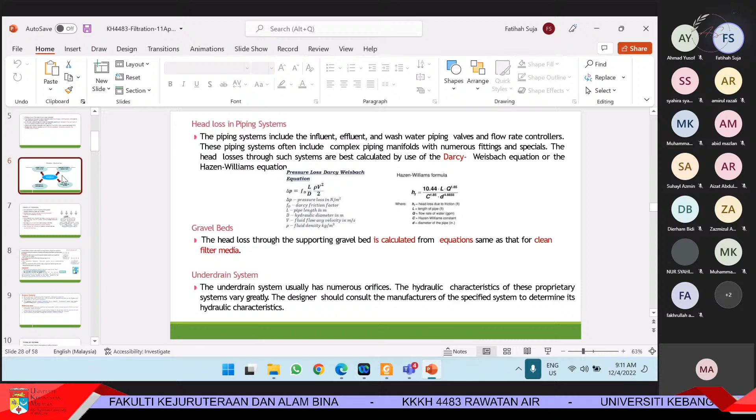Yesterday we were talking about 2 types of filter, sand filter, which is actually a physical process, but the mechanism on which the colloids or suspended solids are removed actually depends on a few mechanisms: adsorption, straining, biological also, because we have that slime layer of biofilm, and we also have what else? These 4 methods: adsorption, straining, biological, sedimentation, and also electrolytic action.

So of course the decision on whether to use slow sand filter or rapid sand filter generally depends on the amount of flow that you want to treat, because usually after sedimentation, the quality, the suspended solids, the turbidity, they still have 1 to 10 NTU, or 5 NTU. So that's why we need this filtration before the water is treated for disinfection.

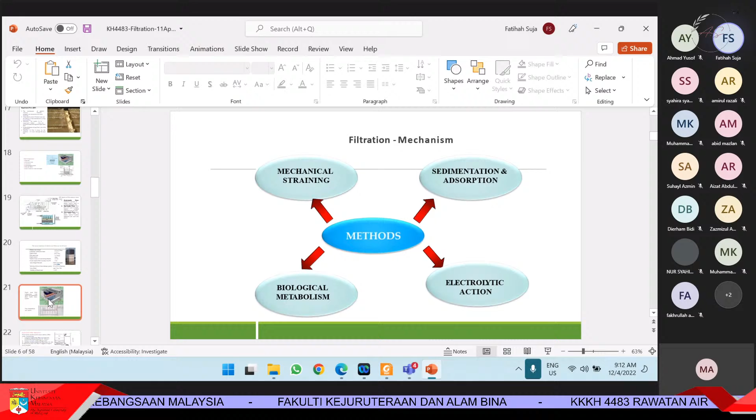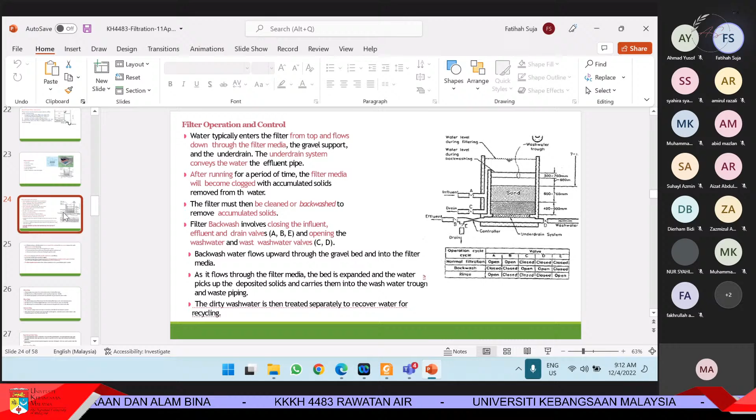Okay, so we continue on from yesterday. The rapid sand filter, because this is something that you can filter at very high loading. So you need to backwash the system, meaning that why you need to backwash the system, because once you arrive at the head loss, head loss meaning that the effluent turbidity will increase. So that's why you need to backwash the system, meaning that you have accumulated all the solids in the pores of the grain or media that you use for your filtration.

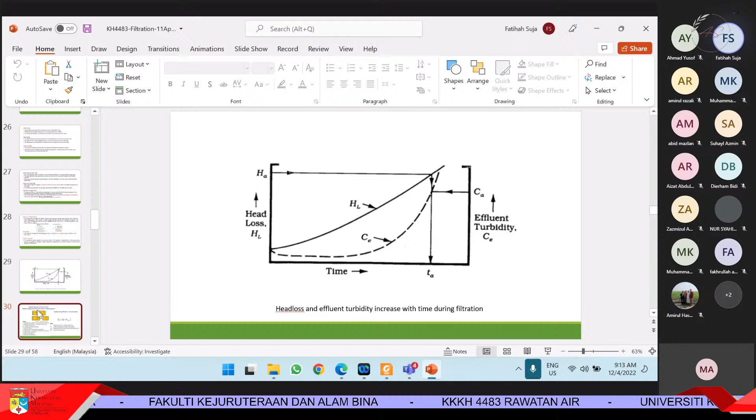That's why you have to backwash the system to dislodge or to make sure that you wash out all the accumulated solids in the pores of the media. Okay, so this is the equation, because even though it's due to the suspended solids, at the clean filter bed, meaning that at the beginning, before you input any influent to your filtration unit, you have already experienced a head loss.

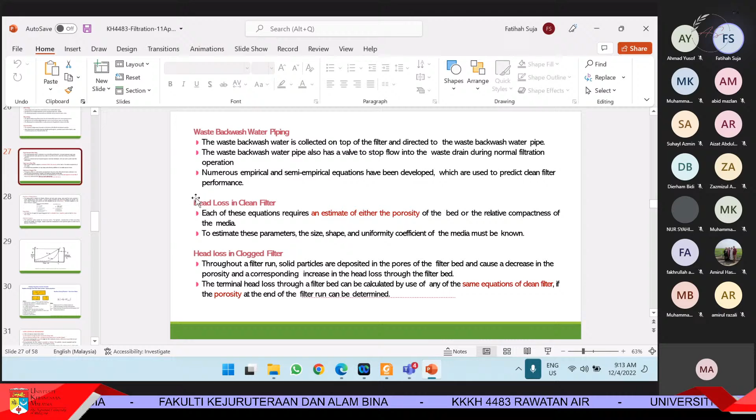So the head loss is actually due to the piping, due to the gravel in the system, due to the media, clean media in the system. The equation used to calculate the head loss in a clean bed is the common Carmen-Kozeny equation. It's very easy because it's given here. You have to calculate the head loss in terms of meters.

You have this value. You have to calculate V over A, the grain volume over the grain surface area. Then you also calculate the filtration rate here. So you calculate these two values based on the data that you have for your system, and then you calculate the head loss. Okay, so this is the head loss for clean filter beds.

Okay, the head loss during filtration, meaning that after you use your filter to clean the amount of water that you want, you will again experience head loss due to the suspended materials in the pores of the media. So this is the equation. Actually, this equation is based on the derivation from the common Carmen-Kozeny equation and also the Bernoulli equation. So this is what you get.

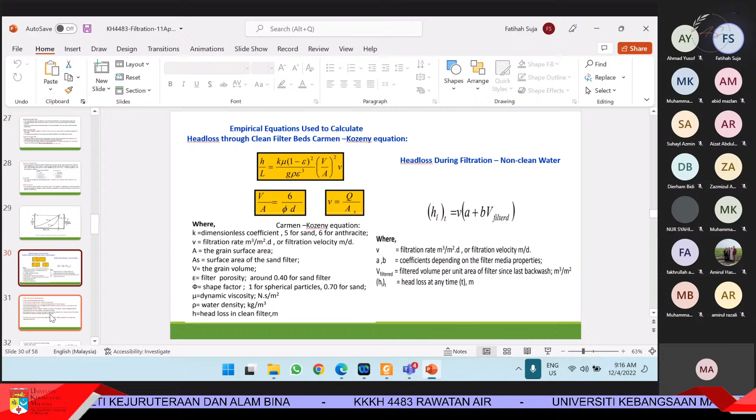And then, the filter cleaning or backwashing. The head loss through the filter exceeds the design value because you have already calculated the head loss where you have to backwash the system, or a pre-selected maximum filter running time has passed since it was last cleaned.

Sometimes after you run the filter unit for some time, you can estimate what the operation cycle is for this filter, meaning that maybe after 20 hours you need to backwash the system. Okay, so backwash is basically cleaning the system.

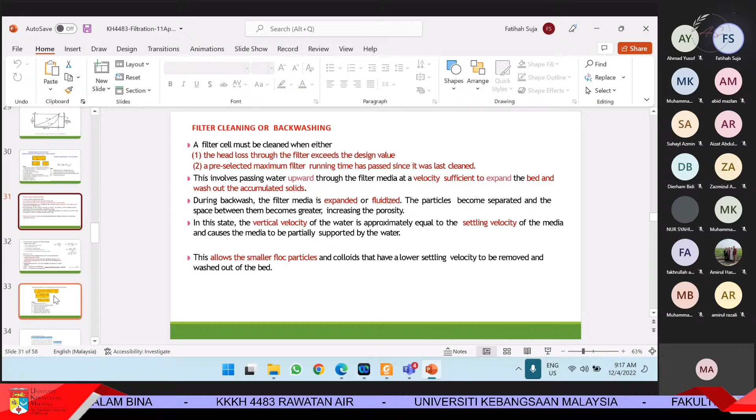To ensure proper operation of the filter, the design engineer must consider the settling velocity of the media, the backwash flow rate - how do you want to backwash, at what flow rate? Because you have this flow meter and you have to provide water to backwash the system. You need to know the backwash flow rate, head loss during backwash, the duration of the backwash cycle, whether you are using 5 minutes or 10 minutes, and the quantity of water required to backwash each filter. These are all things you need to specify when you design a sand filtration unit.

Okay, the purpose of backwashing the filter is to remove deposited floc without washing out the media, meaning that you just remove the suspended materials accumulated in the pores of the media. Therefore, the vertical velocity of the water during backwash must be greater than the settling velocity of the floc, but less than the settling velocity of the media.

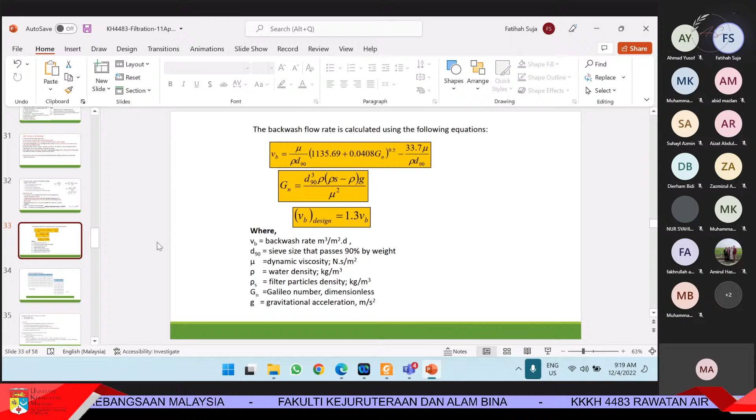So you can always use the formula here, this formula or this formula, or you can also refer to the table from the manufacturer to determine the backwash flow rate. Okay, so sometimes this is only the beginning of your operation of the backwash cycle.

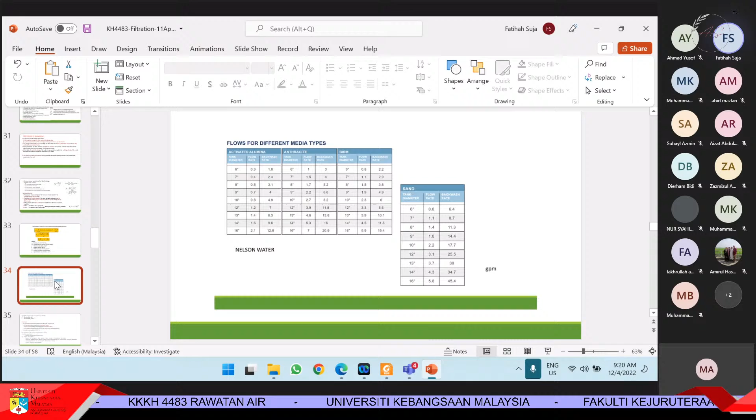After you run the reactor for the filtration unit for quite some time, you'll be able to tell what is the cycle for you to backwash the system.

Typically now we are talking about the support system, because yesterday I showed you the filtration units. So this is talking about the backwash of the media, and this one is about the support system, the under drain and also the gravel - the gravel layer and the under drain system. Actually, the filtration is based on the media, whether sand, anthracite or garnet.

But all of this system, you have this gravel layer that is located immediately below the filter media. The purpose is to separate the filter media from the under drain system and to prevent media particles from clogging the under drain or orifices, so as to dissipate the backwash water jets from the orifice.

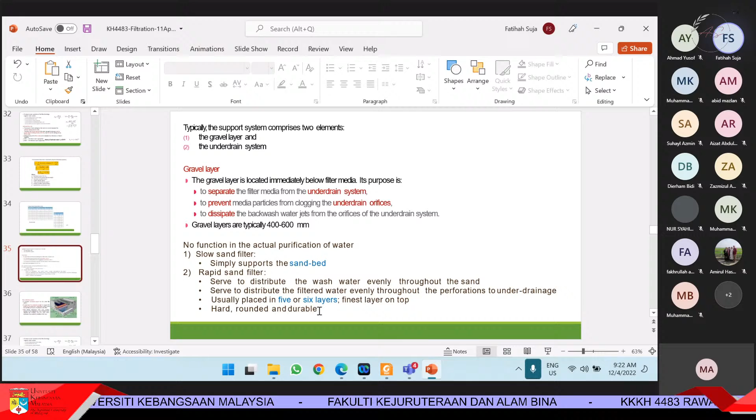Gravel layers are typically 400 to 600 millimeters of depth. There's no function of actual purification of water here - this gravel layer is not filtering. For slow sand filter it simply supports the sand bed, but for rapid sand filter it serves to distribute the wash water evenly throughout the sand and to distribute the filtered water evenly throughout the perforations to under drainage. Usually placed in 5 or 6 layers, finest layer on top, and the gravel should be hard, rounded and durable.

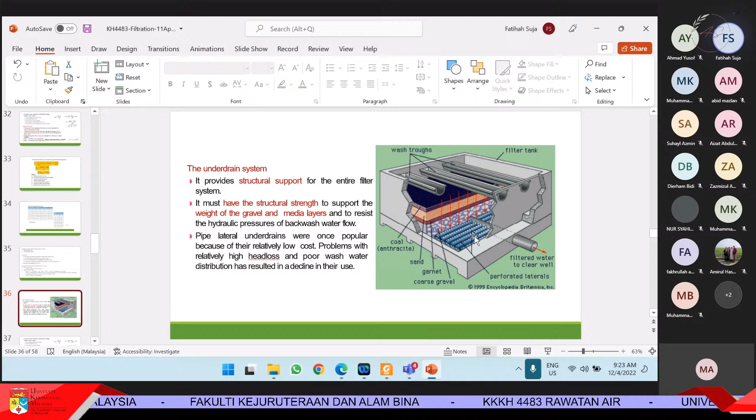So you have the gravel layer, and then you have the under drain system. The under drain system is actually to provide structure for the entire filter system. It must have the structural strength to support the weight of the gravel and the media layers on top, and to resist hydraulic pressures of backwash water flow. So we have this pipe lateral under drains as the under drain system.

So quantity of wash water is the surface area of your filter multiplied by the volume of backwash water - the rate of washing, not the volume, rate of washing. So the quantity of backwash water is the flow of wash water times the time that you backwash the system, maybe 10 minutes or 5 minutes. So percentage of filtered water for backwash water is the amount of backwash water divided by the amount of filtered water - what percent of backwash water do you need for this amount of filtered water?

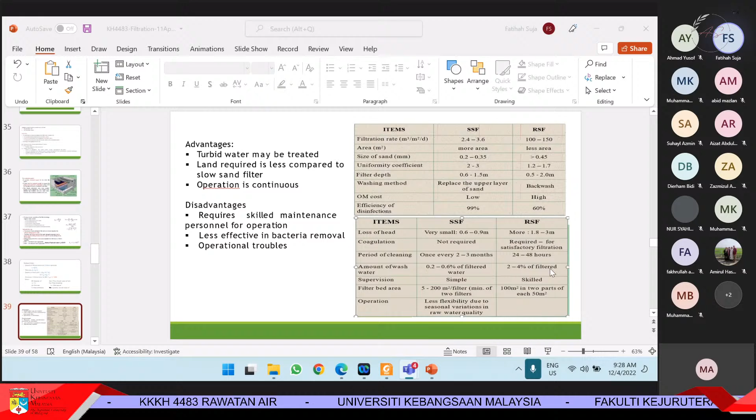Period of cleaning is once every 2 to 3 months, 24 to 48 hours. Then you have to backwash. Amount of wash water - you use the wash water for washing the sand that you collect on top of the system, but usually it's 2 to 4% of the filtered water, based on the formula here.

Filter bed area is 5 to 200 square meters per filter, minimum of 2 filters. But for a rapid sand filter, 100 square meters in 2 parts of each 50 square meters, meaning that for rapid sand filter, usually you need to design your filter width so the area of the top filter is only 50 square meters, but this one can go up to 200 square meters.

Operation has less flexibility due to seasonal variations in raw water quality, so it is not flexible because there's no backwashing. But if you use rapid sand filter, let's say you have higher turbidity raw water quality, then you can shorten the cycle period for backwashing, so that you can wash out all the accumulated solids in the pores of the filter more regularly for rapid sand filter.

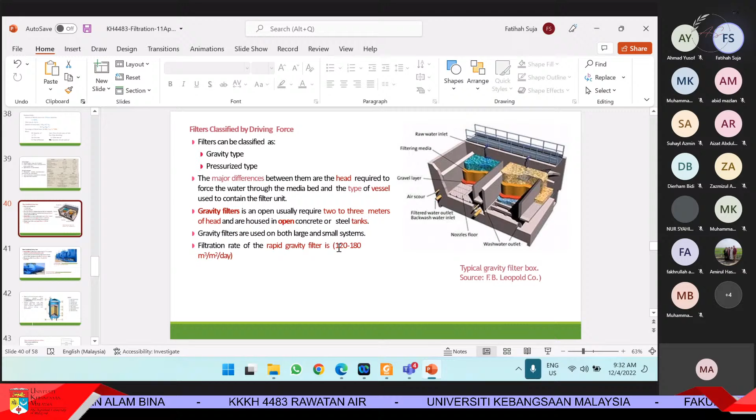So the filtration rate can be 240 cubic meters per square meter per day. Compare this: 240 for pressurized, rapid gravity filter is 120 to 180, rapid sand filter is 100 to 150, and slow sand filter is 2.4 to 3.6.

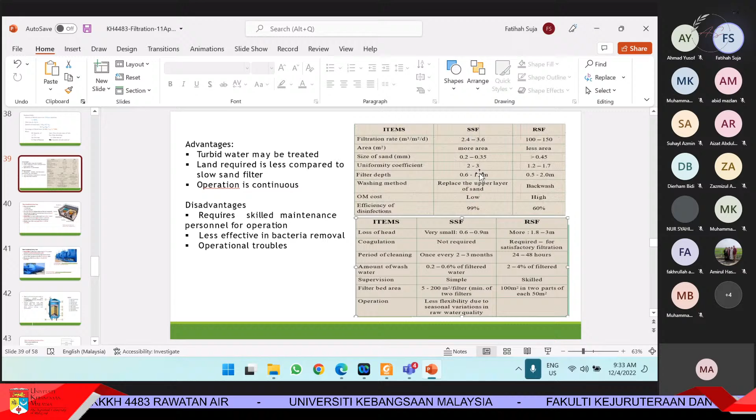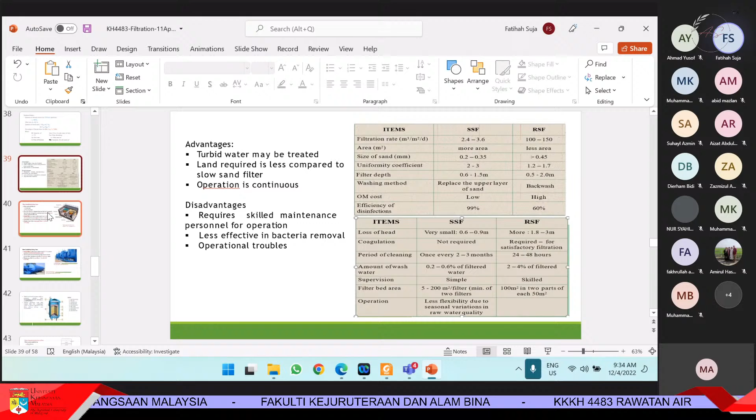So this is for you to choose. I think most of you who choose to use river water for your water treatment plant design will need to use sand filters. So how do you determine which type of filter to use? It's basically first about the filtration rate - because based on the community that the treatment plant needs to serve, you will determine how much water needs to be treated per day. So you need to determine what filtration rate is allowed for your system. You can use SSF, RSF, rapid gravity filters, or you can choose pressure filters.

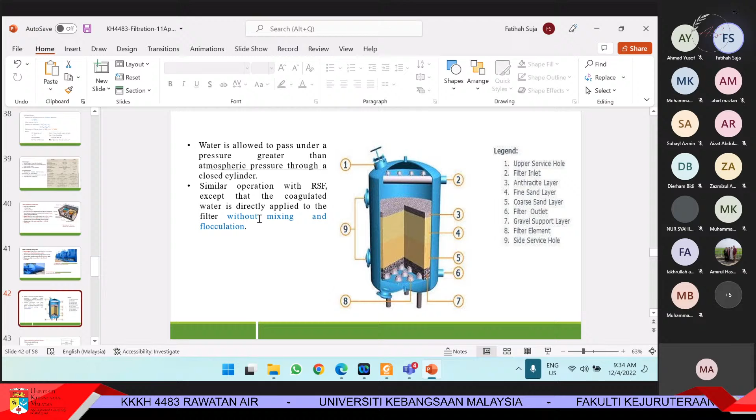So this is for you to determine which type of filter that you want to use. Water is allowed to pass under a pressure greater than atmospheric pressure through a closed cylinder. Similar operation with RSF, except that the coagulated water is directly applied to the filter without mixing and flocculation. So meaning that if you have a very small space and you don't have space for a coagulation unit and also a flocculation unit, you can use this pressurized filter.

You can also classify filters based on the direction of flow. Most sand filters are downflow, where the flow through the media bed is downward. Or you can have upflow filters where the water flows upward through the media bed, as illustrated. This type of system is rarely used in granular filters, but is sometimes used in granular activated carbon. It's very difficult to have upflow filters if you just use sand. Some experiments say that upflow filters are more efficient, meaning the efficiency is better. But of course, for granular filters, it's difficult because usually by gravity, it's easier to have a sand filter.

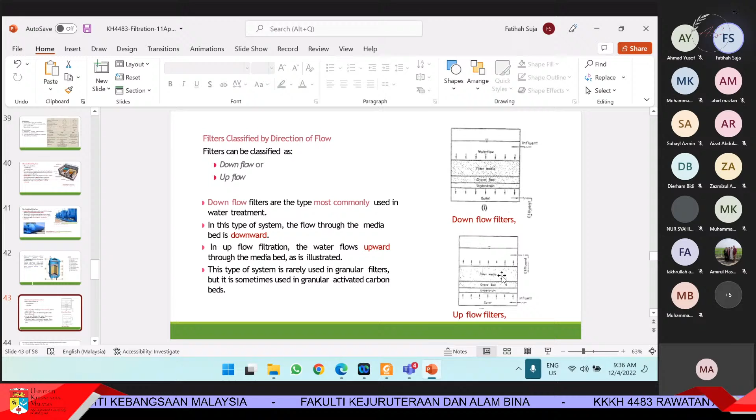But if you are using the media as activated carbon, you can use an upward filter, because you have higher pore surface area in the activated carbon compared to the granular filters.

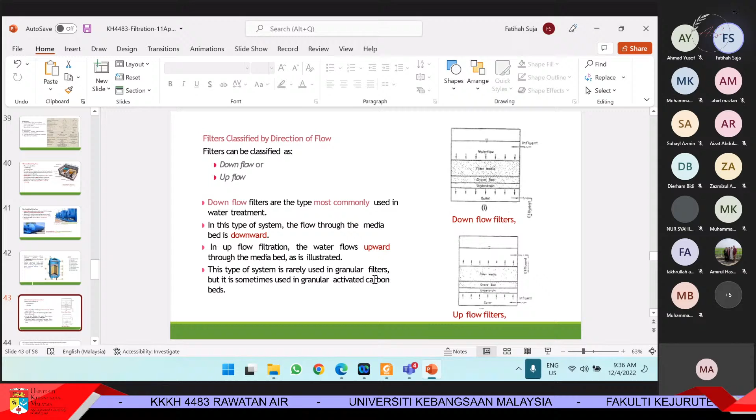Selection of filter media is important also in filter design, as the media control the solid holding capacity of the filter bed, hydraulic loading rate of the filters, and finished water quality. So you have single or mono media, dual media, or you can use mixed or multimedia.

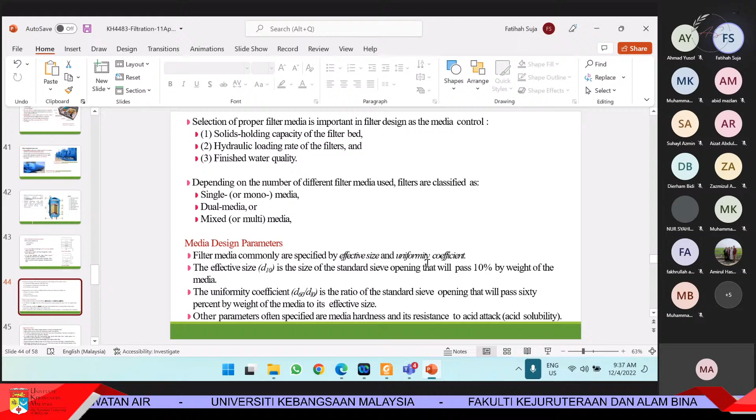Media design parameters are commonly specified by effective size and uniformity coefficient. Effective size is the size of the standard sieve opening that will pass 10% by weight of the media. I think all of you are already very familiar with this effective size and uniformity coefficient from your structures lab, I guess, because I'm not a civil engineer, but I guess you are familiar with this. The uniformity coefficient is the ratio of the standard sieve opening that will pass 60% by weight of the media to its effective size.

Also, the media need to be resistant to acid attack, and also need to be hard.

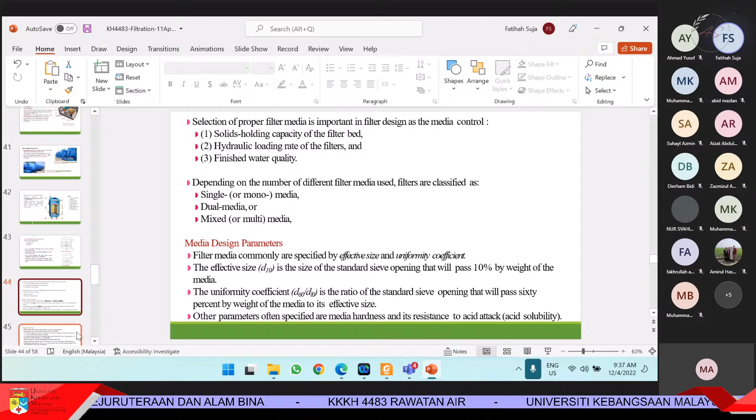When you use single medium filters, usually well-graded sand is used, so large particle sizes are at the top, followed by smaller size particles. But the problem is after you have the flow. Let's say if you use a rapid sand filter with single medium filter, at the beginning you put the larger size particles, but over time you get what we call reverse gradation, or stratification, meaning the larger media ends up at the bottom and the smaller media ends up on the top, the grains of the sand.

This always makes the system inefficient, because when you have the very small grains on top, only 4 to 5 centimeters of the filter bed is utilized, because straining happens and it stops more influent from going deep into the media. So single media filters are not good because of this reverse gradation, they become ineffective.

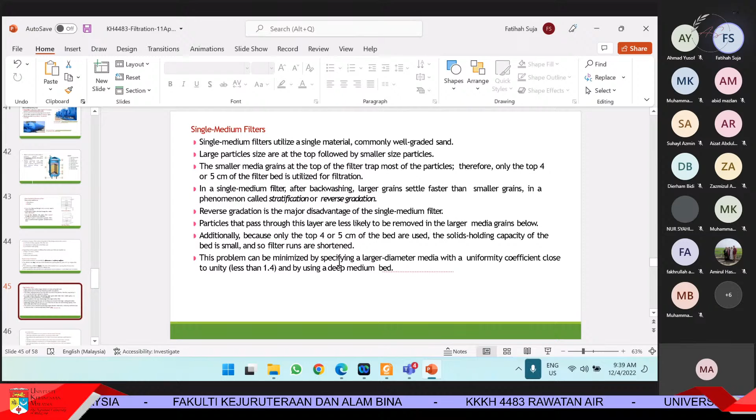The problem can be minimized by specifying a larger diameter media with a uniformity coefficient close to unity, and by using a deep media bed, so it's difficult for the larger media to settle deep down the bed.

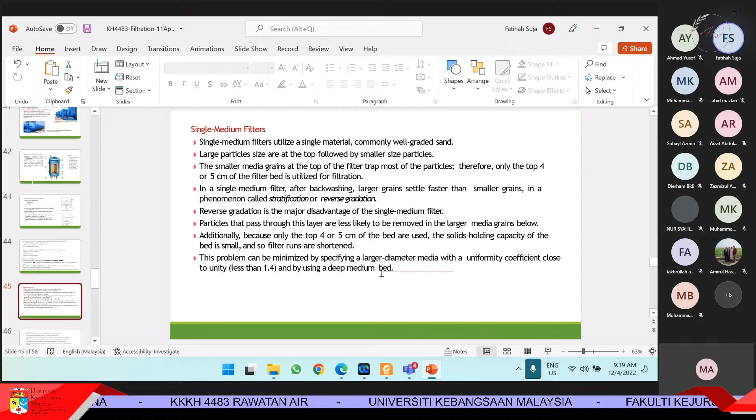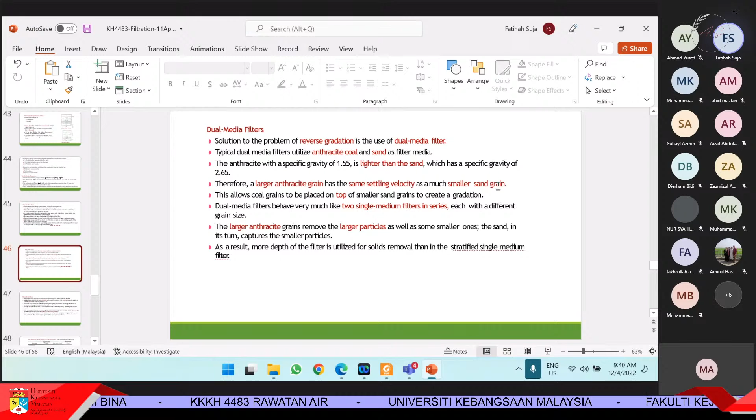You can also have a dual media filter, which is the solution to the problem of reverse gradation. You can use anthracite coal and sand filter media. Of course, you put the anthracite on top because it's lighter than the sand, and it has a specific gravity of 2.65. Therefore, a larger anthracite grain has the same settling velocity as a much smaller sand grain. So the anthracite grain will always be on top, and this increases the effectiveness of the bed for filtering the influent, because the anthracite has a larger pore size, so you get more usage of the depth of the filter. Otherwise you only use the top of the filter media.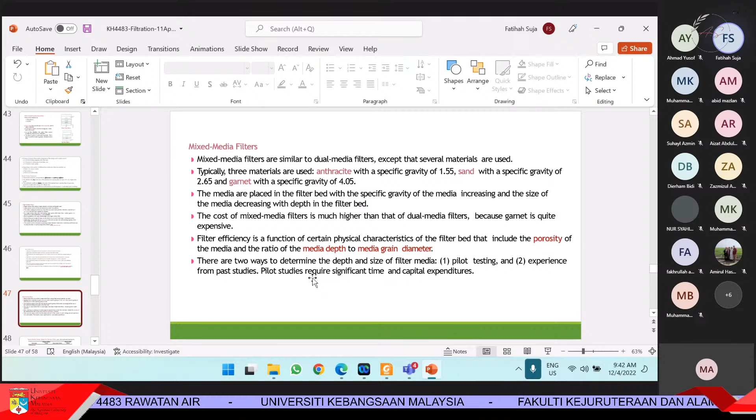There are two ways to determine the depth and size of filter media. First is pilot testing, and also experience from past studies. Of course, pilot testing will increase the capital expenditure of your water treatment plant. But if you have experience gathered from past studies, then you can always select the filter media depth and size.

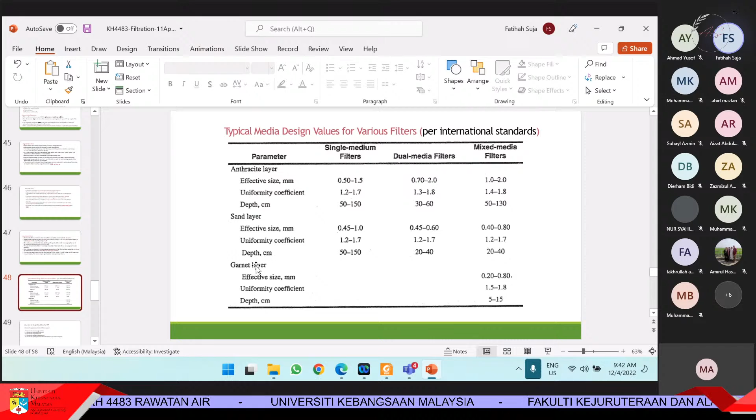These are the typical media design values for various filters: single medium filter, dual media filter, and mixed media filter. For a single medium filter, the media can be sand media or anthracite layer, so you choose one. But for dual media, you can have these two. For mixed media, you can have these three.

So how do you design the calculation for a rapid sand filter? You have to calculate the flow through one filter. For a rapid sand filter, usually one filter you specify the surface area to be like 50 square meters, but for a slow sand filter, it can go up to 200 square meters. Calculate the surface area of one filter, calculate the length of the tank, calculate the volume of the backwash tank, calculate the openings of the manifolds and laterals of the under drain system.

Usually for this, you will get advice from the contractor.

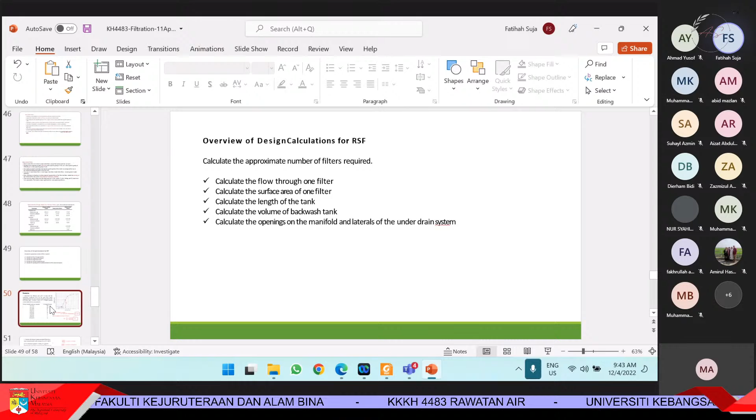I want to show you examples for designing and calculation involved in the filtration system. I'll give you homework, only two questions, next week, but this week I'm going to give you examples.

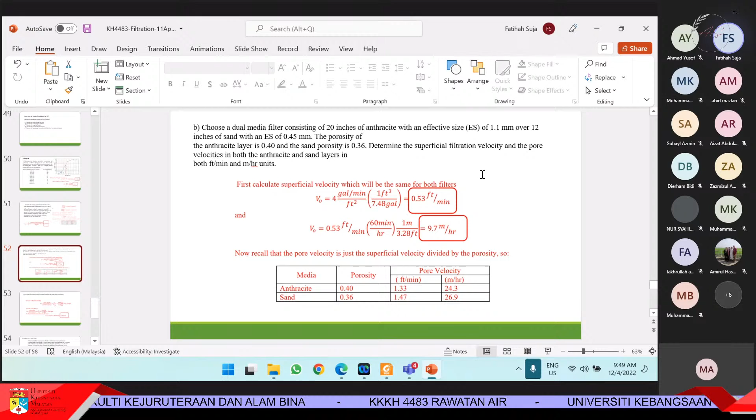As I mentioned, you can use an equation to determine filtration velocity. You can also use the tables from the manufacturers.

I hope that when you go back, you look at this calculation carefully, and then you can ask me questions if you don't understand any of this calculation. You can ask me during our next lesson, next week.

Calculate the detention time through the entire depth of the filter. For anthracite media, how do you determine how long each cycle of the filtration, the detention time, takes? For the anthracite media, it's 1.25 minutes. For the sand media, it will take 0.68 minutes, depending on your bed depth and the pore velocity of your media. Sometimes you want to determine how long it will take for the filtration unit to occur.

This is a question about detention time. This one is about head loss in a clean filter. As I mentioned, I showed you the Kozeny equation just now. This is the calculation if you use an anthracite layer. If you use a sand layer, then you calculate the head loss in the sand layer by summing the head loss in the anthracite layer and the sand layer. So this is the total head loss for the clean filter for a dual media filter.

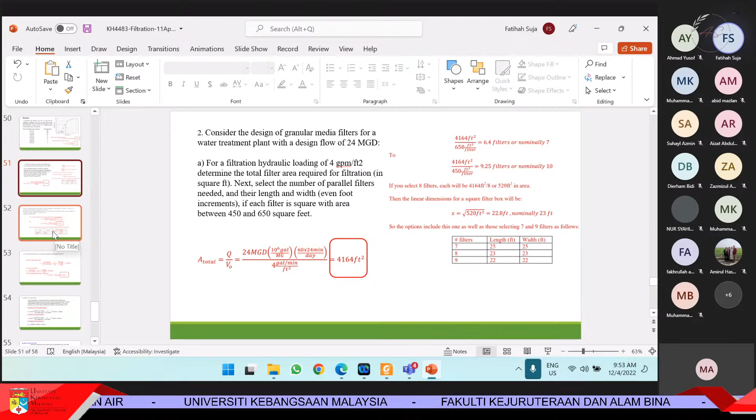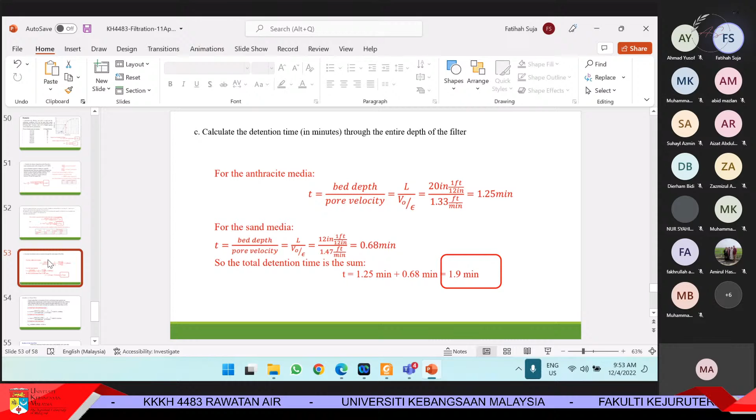For your homework, I'm not going to give you any more questions, but I want you to use graph paper, and calculate this back using your own handwriting, inputting all the units when you do the calculation. By doing this, I won't have to correct your assignment one by one, but I'll be able to tell that you have understood, not just copied. I want you to do the calculation and input all the units, because I want you to really understand how to get the answer. So this is your homework: redo this using your own handwriting, and use graph paper for this.

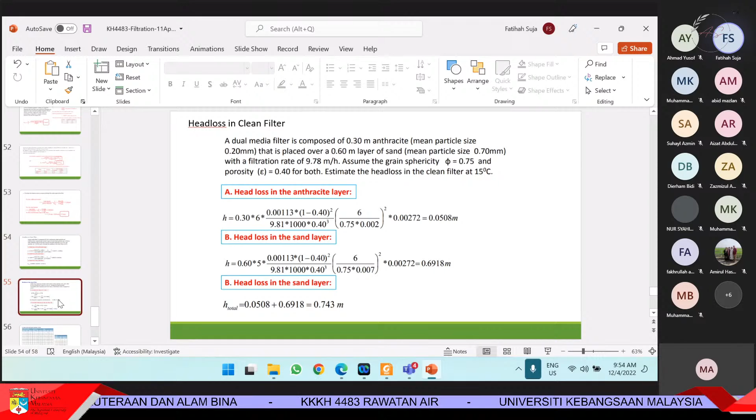Head loss in a non-clean filter: you also use the equation I've given you and input the values, because A and B are for the media after the operation has started for some time. So it's already blocked, the porosity already blocked by the suspended solids or colloids that you filter. So the size will not be exactly the same as when you have clean filter media. You get the size by estimating the values of A and B using the values given here, and then you can calculate the head loss for the new flow rate.

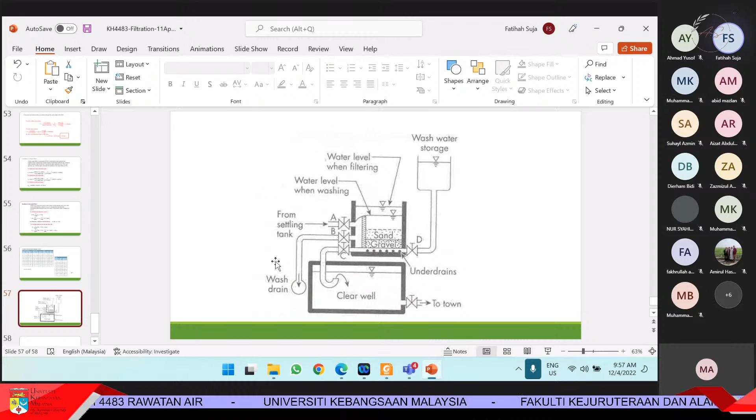So when you backwash the system, you close all the valves, and then after you have completed your backwashing, you open the valve for the wash drain. Then you start the operation again by making sure that this valve is already closed, the wash drain and also the backwash water. Okay, I think that's all for the filtration unit.

So it is very important for you to understand which type of filter to be used and what are the design parameters that you need to consider when you design your water treatment plant. Any questions from all of you? We have 3 more minutes. Any questions, students?

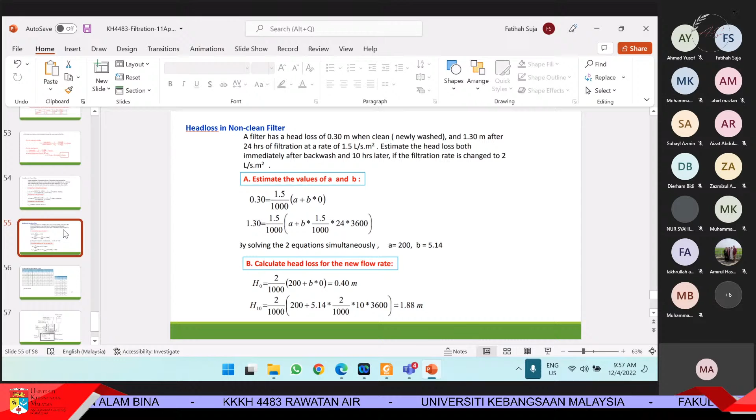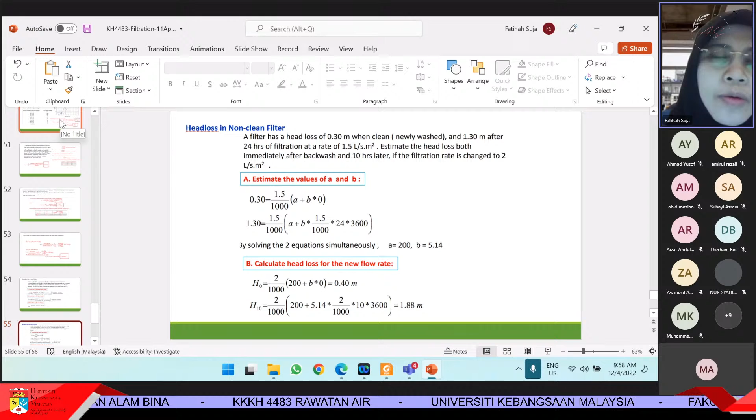Because previously I thought of giving you new problems, but I think because this one they don't put the unit, so I want to make sure that you are able to do it. When you do it using your handwriting, you will be able to understand the steps, and I don't have to mark your assignment because I know the answer is there, but I want you to do it again.

Because I don't want to affect your grade. What do you think? If you are okay, I mean, because I thought that it's good for you to understand each other. We need to make use of this better mobility program to know more about students from other countries. But of course, maybe it's a bit difficult for you to discuss because you have different classes, different times with them.